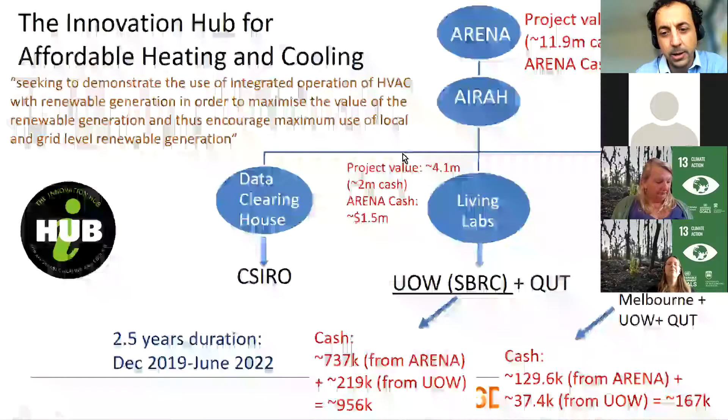But today I'm here to talk about, not about the Sustainable Buildings Research Centre, but a project that we are working on at the Sustainable Buildings Research Centre called the Innovation Hub for Affordable Heating and Cooling. This is a project that is partly funded by ARENA, the Australian Renewable Energy Agency. It's a very large project, total value about $18 million, and ARENA is putting about a third of that. The various partners are CSIRO, our university, Queensland University of Technology and University of Wollongong, and our university is also putting some cash contribution into this project, which helps a lot to be part of this initiative.

And one major partner is the Australian Institute of Refrigeration, Air Conditioning and Heating, or AIRAH as we call it, and they are really the interface between ARENA and the rest of the partners in the project. Now, what I will call this iHub, Innovation Hub for Affordable Heating and Cooling, we call it iHub.

Essentially, the project is a 2.5 years project that looks to demonstrate how we can better manage the heating, ventilation, air conditioning loads in buildings to shift them towards the periods of the day or of the year when we have renewable energy generation, and in this way maximize the value of renewable generation. Because as you probably know, this crowd here knows that some of the disadvantages with renewable energy is that the loads don't necessarily match together with the generation, so that imposes some restrictions in the electricity grid. We are looking into how to better manage those limitations and improve that and maximize the value of renewable energy, so that we can see further deployment of renewable energy systems in the near future.

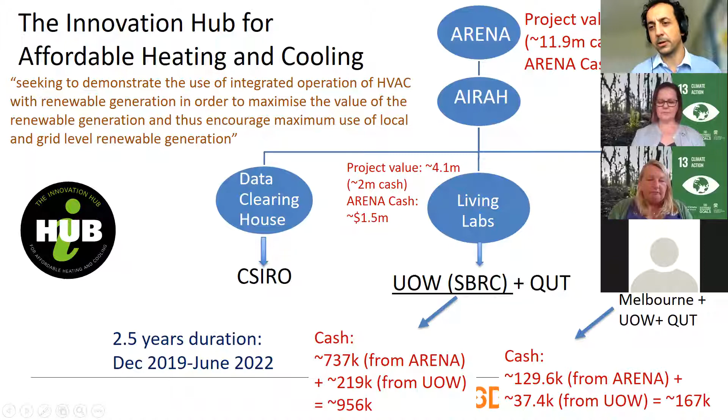As a university, we are involved. I would say there are three really activity streams in this project. There's the Data Clearing House project, which is an initiative that we are not really involved in - CSIRO is really managing that. But as I will explain in the next slide, this is really a kind of data broker that looks to bring together building owners and data providers to be able to connect them so that there is a better management of energy loads in those usually large commercial buildings. I'll talk about Living Labs, which is the main stream that our university is part of - I'll talk about that in length in this presentation - and then I'll also discuss what we call the Integrated Design Studios, which is an initiative managed by the University of Wollongong, but we are also participating to deliver some of the sub-projects in this stream.

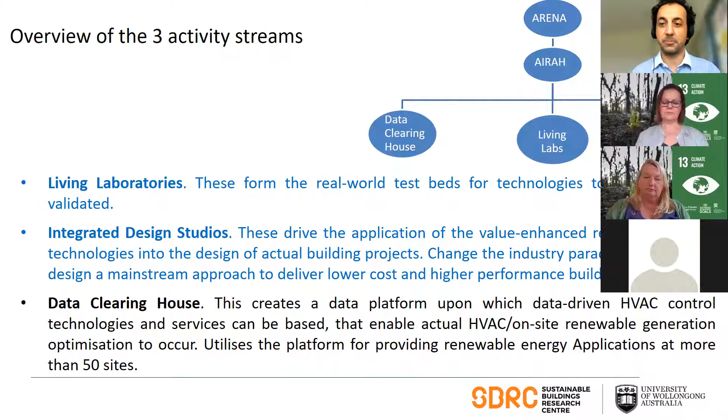The design studios are classroom activities that bring together consultants from different disciplines with students and academics, trying to improve the early design stage of buildings and enable more integrated thinking between disciplines, bringing ideas of making buildings more sustainable and enabling renewable energy integration right at the early design stages, which isn't happening in most situations.

So I'll start with the Living Labs. There are several sites where together with QUT we are deploying our monitoring equipment and doing technology evaluations. We separate those into healthcare sector Living Labs and education Living Labs.

I'll briefly cover those our university is involved with. There are 2 schools in ACT, and an aged care facility near Wollongong. There are also 2 sector-wide projects that ourselves and QUT are managing. We're mostly involved with the education one, and QUT is managing the healthcare one.

In these sector-wide analysis projects, we are looking into establishing baseline energy use, renewable energy generation, and other key performance indicators for the ACT schools across the whole state. We've now received additional funding to expand that and include schools from New South Wales and Victoria, and other schools where data are available.

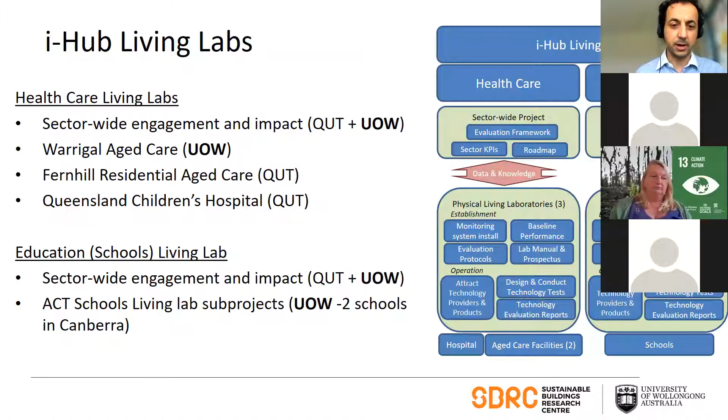Now the Living Labs, okay, there's something in the chat.

The Living Labs, as I mentioned, are real buildings where we use a set of KPIs that we developed to evaluate their performance in terms of enabling better value for renewable energy. They are also the test beds where we get technology providers to bring their technology forward and evaluate it in relation to enabling better utilization of renewable energy.

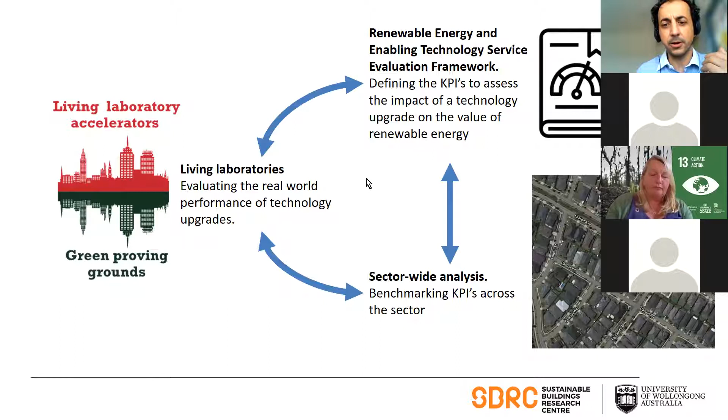We developed what we call REETSEF KPIs, the Renewable Energy and Enabling Technology Service Evaluation Framework, to look into shifting HVAC loads, or energy loads in general, from buildings towards the periods of the day where we have renewable energy generation.

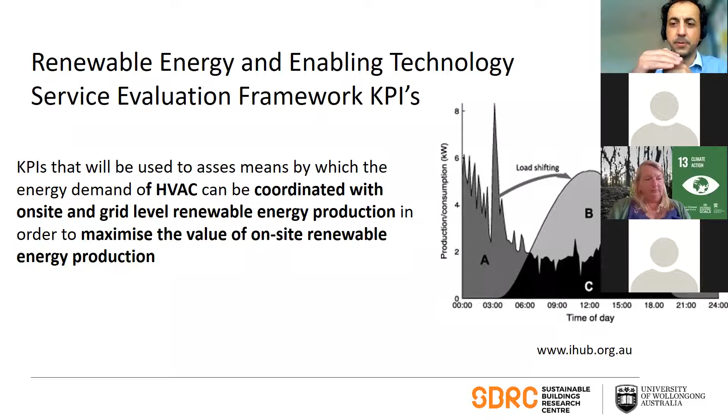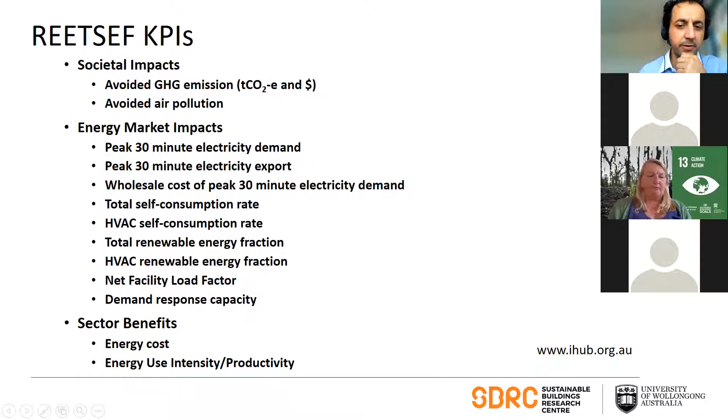A set of KPIs that we developed - I don't have time to go through each one separately, but you can see the relevance to this crowd, as we looked into different types of impacts to society. Arena is interested a lot in the KPIs in the middle, and also sector-wide benefits in general, so I won't go through those.

In ACT, we've got two schools. We've got a very old school from the 1980s, Fadden School, which uses a lot of gas. And we have another school built in 2005, a very large school of about 16,000 square meters, called the Amaroo School. I'll briefly go through those schools in my presentation.

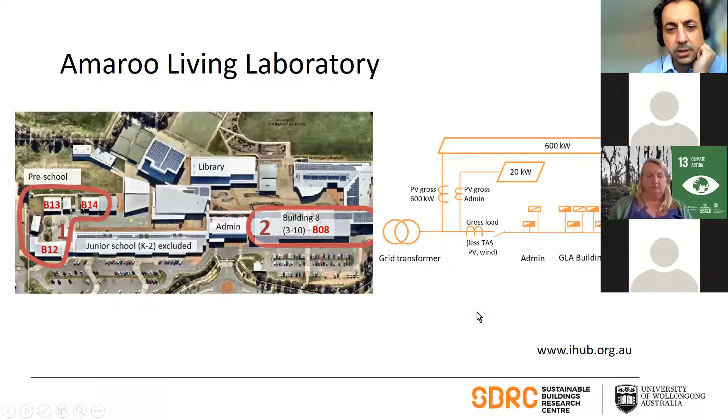For the Amaroo School, we didn't have funding to monitor the whole school, so we monitor sections of it. There is renewable energy generation on site, which we also take into account. We deployed our equipment and a weather station, measuring temperature, relative humidity, and CO2 in classrooms. We use Wattwatchers to measure sub-circuit electricity use, and get the data to our database through a LoRaWAN network. We're also looking into gas.

We quantified our results using our KPIs. The first round of the REETSEF evaluation has finished, but I won't go through all of those details.

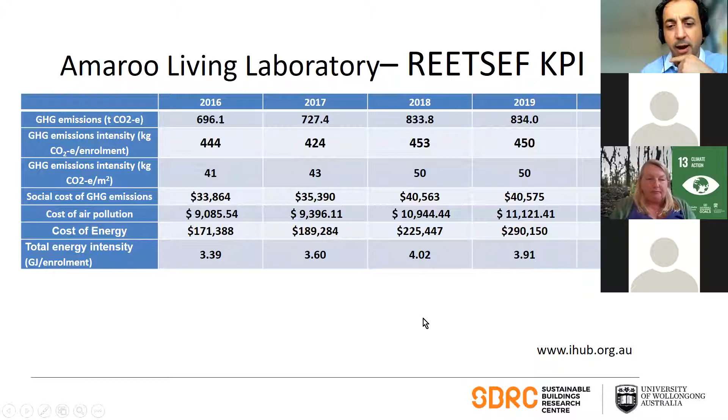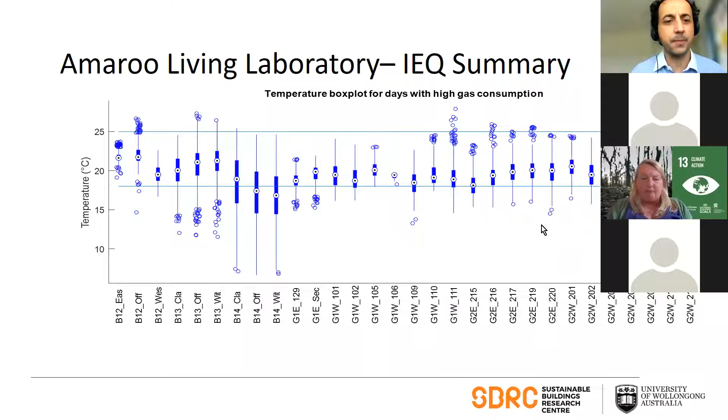In general, this school is relatively poor in terms of temperature. We looked into time series graphs and analyzed our results, putting them in context in terms of comfort ranges and temperature ranges over a period of now more than a year, though this one is I think a 9-month period.

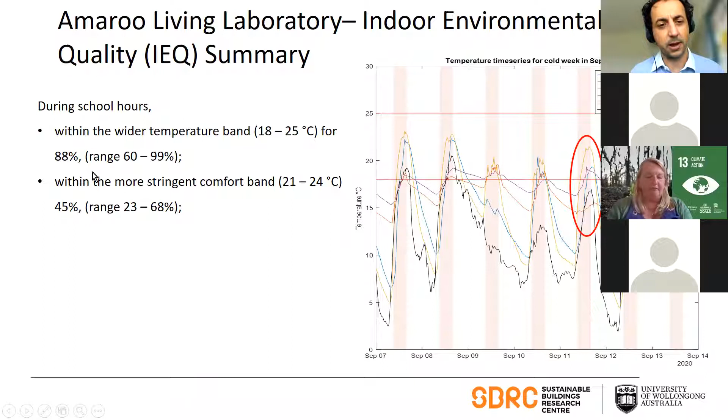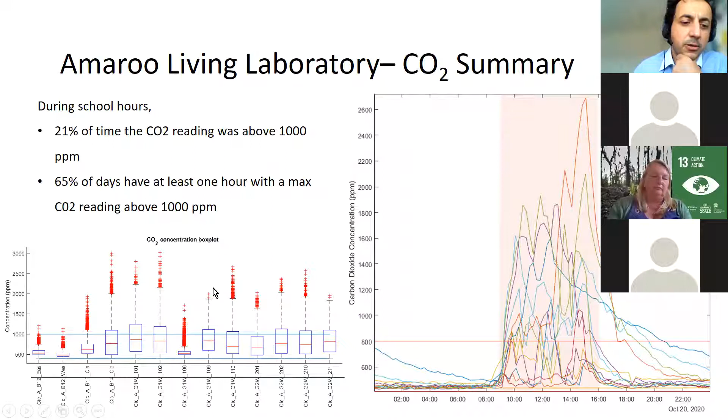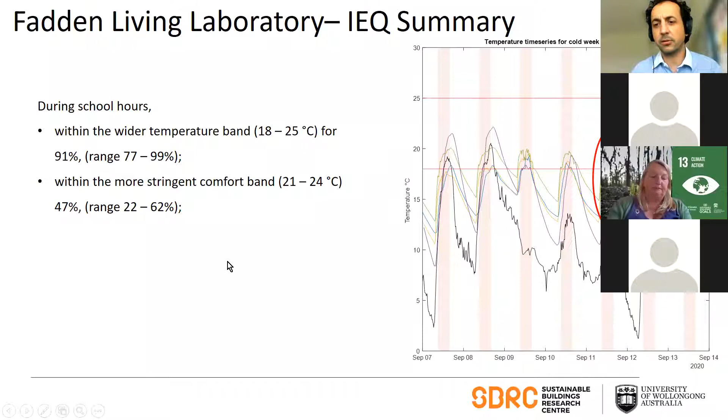So we've got all of this data and we now know how the schools behave. We did the same for the Fadden school—I won't go through the results in detail there, but again we got a few issues with comfort in terms of temperature, though CO2 was much better in that school, with not many instances above 1,000 ppm. Despite this being the older, perhaps leakier school, we're not sure why this was happening.

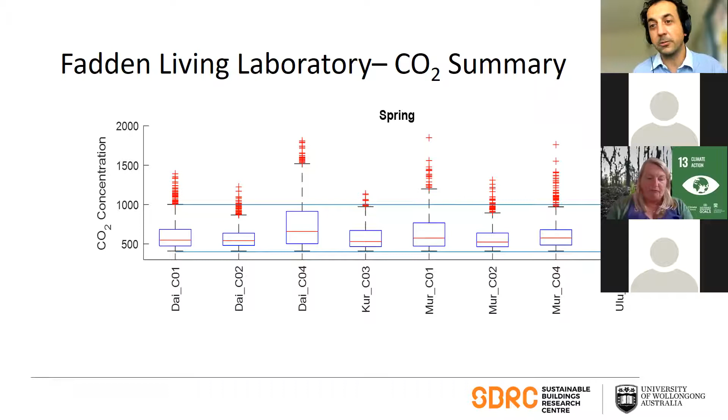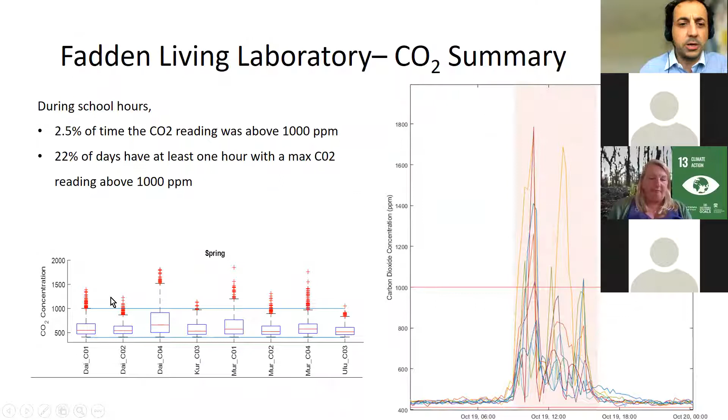This was during spring—in winter and summer you close the windows because the HVAC system is running. So we suspect schools have higher ventilation requirements, and things may become more negative, because in February, for example, when it's very hot outside, the air conditioning system may be working while windows are open. Let's see what happens in winter—something similar will probably happen with a heating system. Again, no significant CO2 issues here, although there are instances of high CO2 levels in classrooms.

We developed a whole-of-life planning framework to enable the ACT school government to make decisions on purchasing air conditioning systems, accounting for energy savings, sustainability, and cost savings in an integrated approach. I thought I had a link in my presentation to download that document, but it looks like my OneDrive didn't update the presentation.

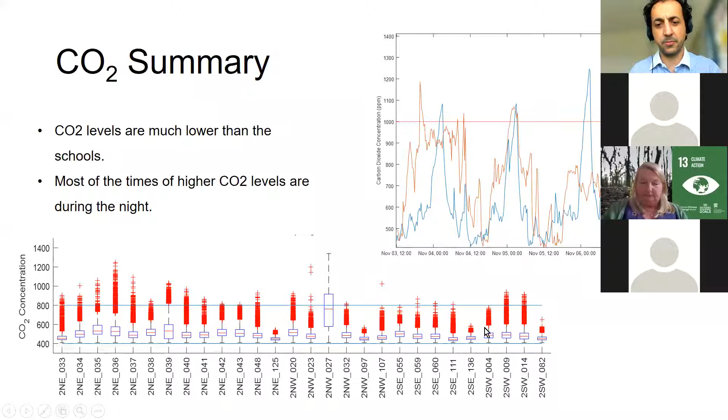For the aged care facility, we did something very similar. I'll skip a few slides as I'll probably run out of time. Again, we have CO2 level graphs there—no significant issues, much better performance than the schools. The same with temperatures: it looks like the air conditioning system in the facility is doing the job it's meant to do. We didn't find significant issues with low or very high temperatures in either summer or winter.

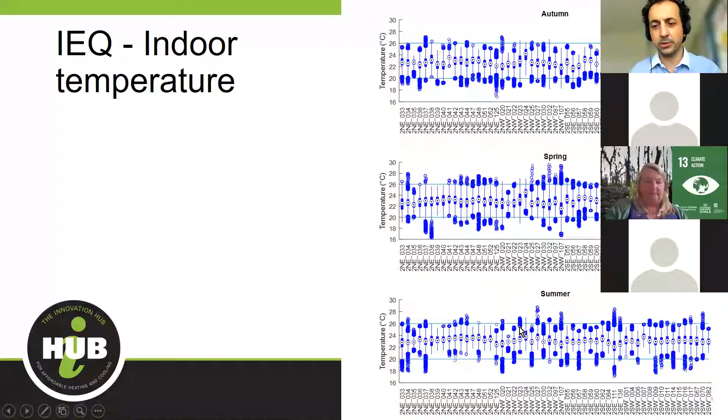That is a very new facility, I forgot to mention. And the system is doing what is meant to be doing.

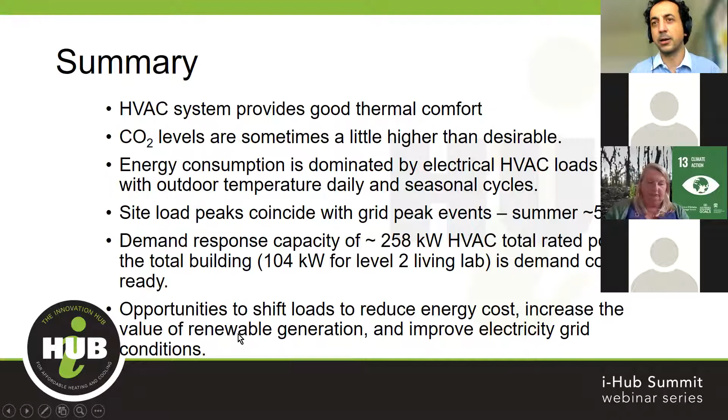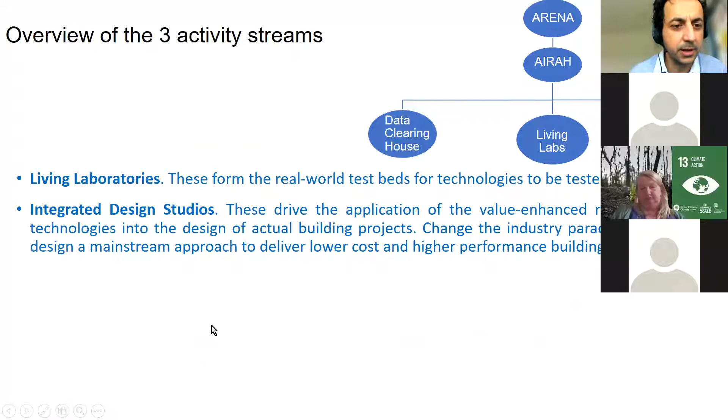I'm suspecting I'll probably have another 5 minutes or so. So this is more or less what we are doing for the living labs. And I cut down a lot of slides from my presentation before this meeting here. With integrated design studios, we're working with University of Wollongong.

Perhaps I should mention what is an integrated design studio. These are workshops that take place in classrooms at the start, and consultants are coming together. We engage a client who gives us a real project. So far we've had 4 of those run at Wollongong. We have 4 consultants coming in every classroom, every week, working together with the students, addressing a project that the client puts forward.

for a design for a building. And I'll go through what we had so far, but the idea here is to get the architects working together with engineers to enable a collective thinking of how we can improve designs during the early design stage. And in this way, we can enable more integration of renewable energy and more passive design solutions in buildings at the same time.

So these studios are win-win project incubators. The clients win by accessing for free early ideas of what the new building could be. The consultants, architects and engineers, they get paid by ARENA, but at the same time, they get to network with both clients, ourselves, and between them.

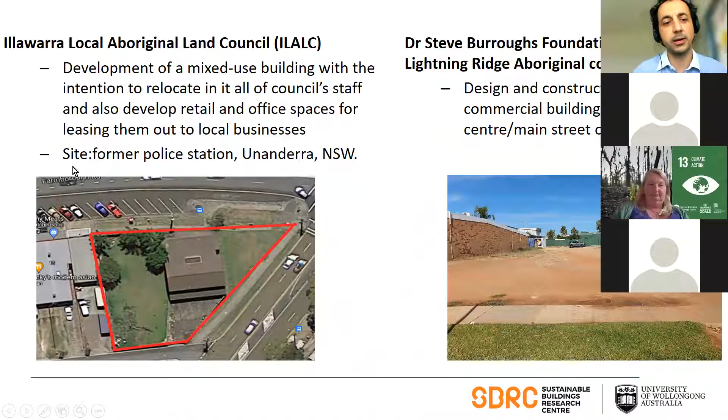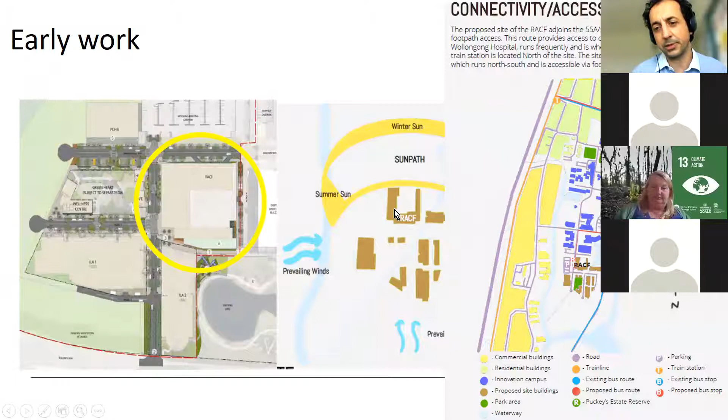And the students started producing great work out of these projects. They've done a site analysis where they looked into things like solar paths, prevailing winds, and so on for the project sites. They developed huge matrices where they put together various design solutions that they came up with, and they started ranking them initially without very detailed calculations, but then later on we moved into detailed analysis, and these design solutions are very relevant to the crowd that we have here today.

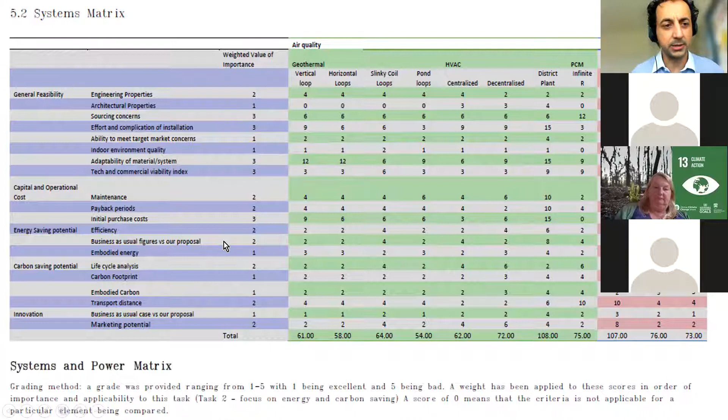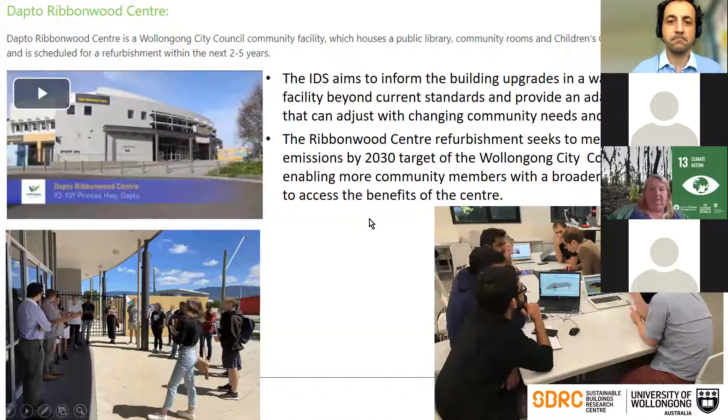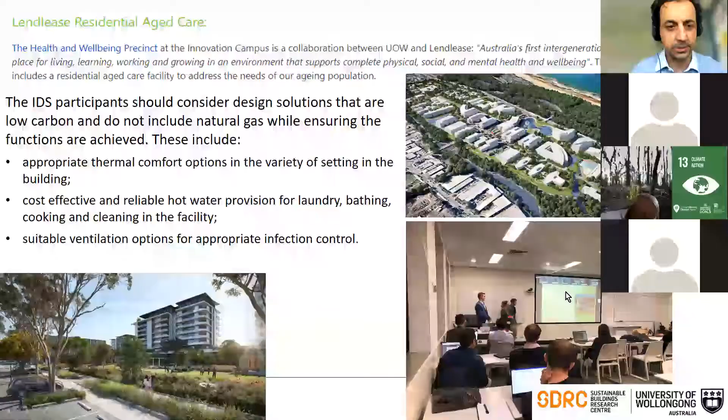The same with the Lendlease project. The students gave presentations to both the clients, the consultants, and ourselves. They brought forward several good ideas that were interrogated by the consultants, and they were forced to think on how to beat the business-as-usual cases. So as part of the project, they had to benchmark their ideas against the business-as-usual cases that we see out there.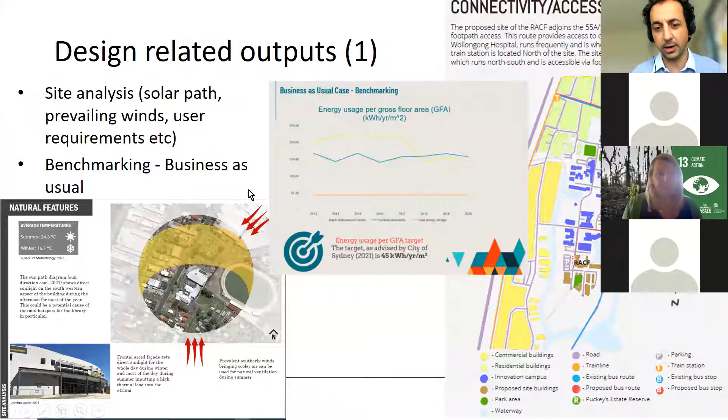And for the other two, the Aboriginal projects, the students, we're running them this semester, and the students started developing visualizations that later on they will be installing PV systems and so on to quantify those relationships between energy demand and supply.

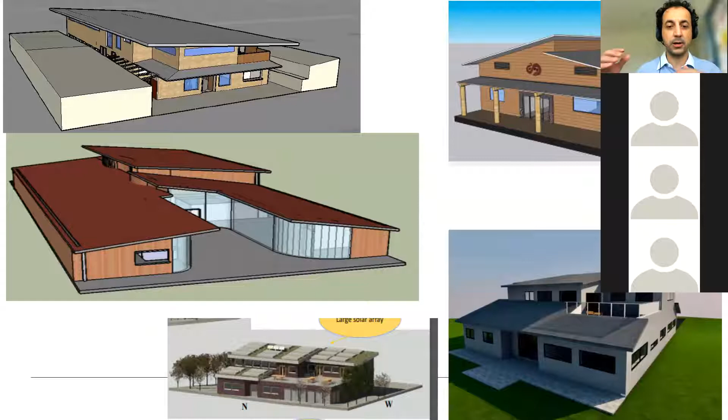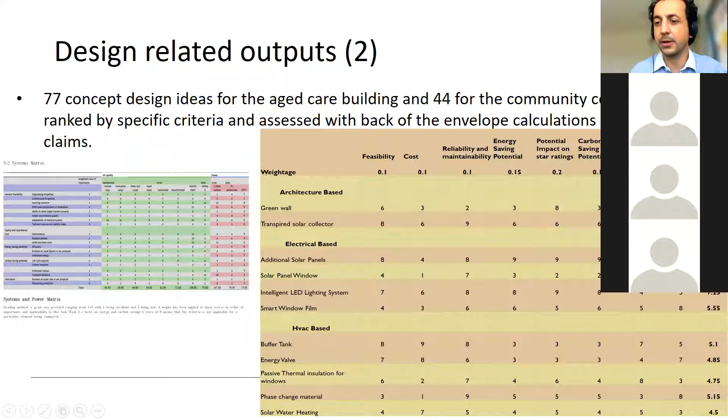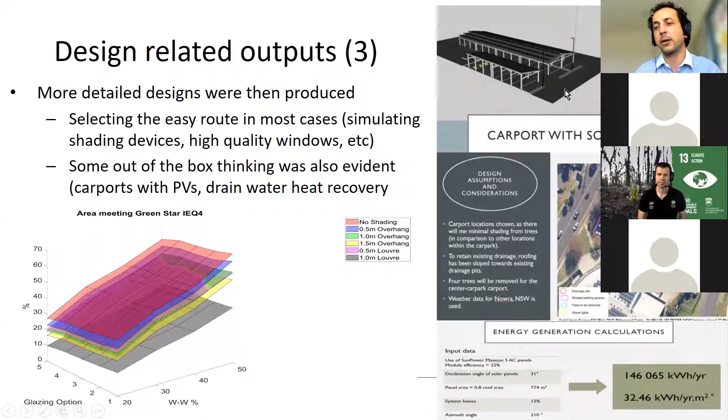Again, a lot of design solutions for all the buildings of the studies in the matrices, and some very great ideas and detailed analysis that the students used computational tools to quantify. As one particular example, this is the Dapto Ribbonwood Library. One of the students looked into detail how to modify the parking and enable carports with PV panels on top for electrical vehicle considerations in the future.

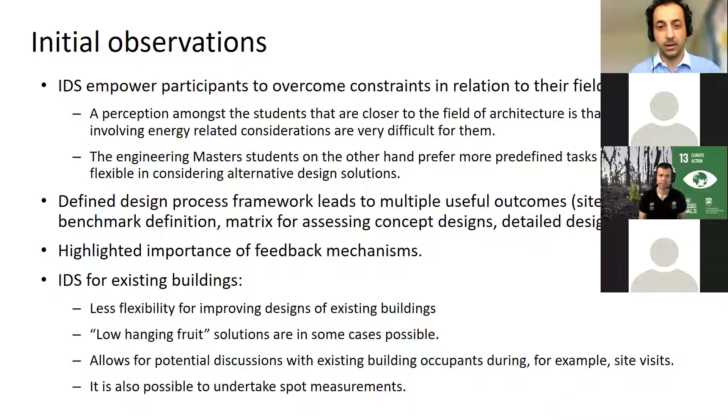I'll skip those observations, but we have seen some differences working with existing buildings versus working with plain sites - it's very different. But in both cases, you need to enable that renewable energy integration thinking in the designs or retrofits.

I'll stop here with this slide, if that's okay. I probably took more time than I should, Clayton.

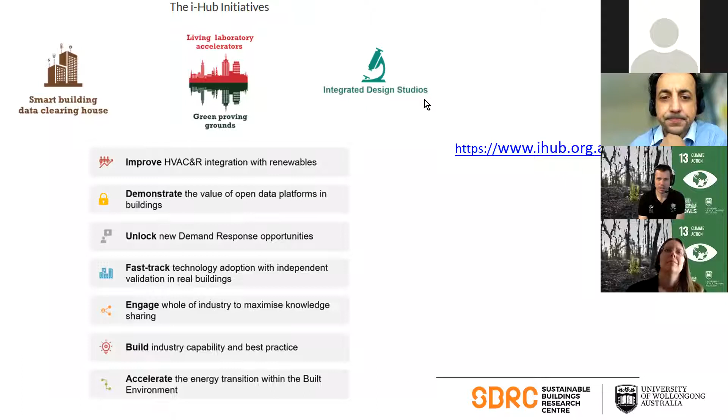Thanks, Clayton, and thanks, Georgios, for taking us through the iHub beforehand. I'm going to talk about another initiative that we are involved in at the Sustainable Buildings Research Centre, and this is called the Sustainable Homes Challenge.

I'm just getting my slides to work. There we go. So the aim of the Sustainable Homes Challenge is to bring together university students this year from around Australia and from a wide range of disciplines to develop innovative solutions to the problem of providing sustainable, healthy and affordable homes. The Sustainable Homes Challenge was dreamt up in around 2018, 2019 by a group of academics within the Sustainable Buildings Research Centre.

And some colleagues as well from other faculties. What they wanted to do was provide an opportunity for students to dream big about some of the big problems facing our world and to think about what they can actually do, and to explore some innovative solutions to some of these challenging problems.

The program is being financially supported by the University of Wollongong's McKinnon Walker Trust. Ken McKinnon was a previous VC of the university, and he and his wife established this trust to support projects that really stretch students' experiences.

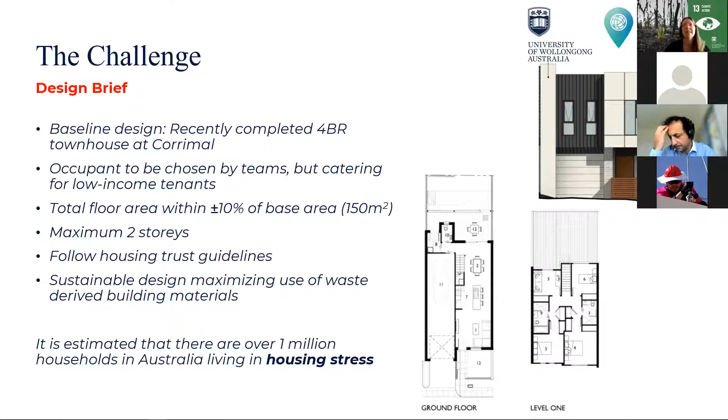So when we've asked the students to design these houses, we've given them quite a broad set of evaluation criteria to hit. They're broadly categorised into 4 different categories.

So the first being sustainable, we want them to look at things like the materials that they use in the life cycle analysis, and what happens to the building at the end of its life. Can you recycle the components of the building? Can you deconstruct it? Can you take it down? Can it adapt if the occupants change? All those sorts of things.

We also want the buildings to be healthy, to ensure that they're meeting the needs of the occupants, so that there's no nasty chemicals being introduced, particularly if using innovative construction products, but also that they're meeting the needs of social and cultural interactions of the occupants with those around them.

And we need the housing to be affordable. So looking at the energy requirements that people can afford to operate and live in these houses in a way that's comfortable. But then other aspects like the value proposition of the house. Is it something that could be marketable? Is it something that could be upscaled and used on a larger scale? And does the supply chain for the innovative materials that they're looking at actually exist, or how can those supply chains develop in order to develop these designs?

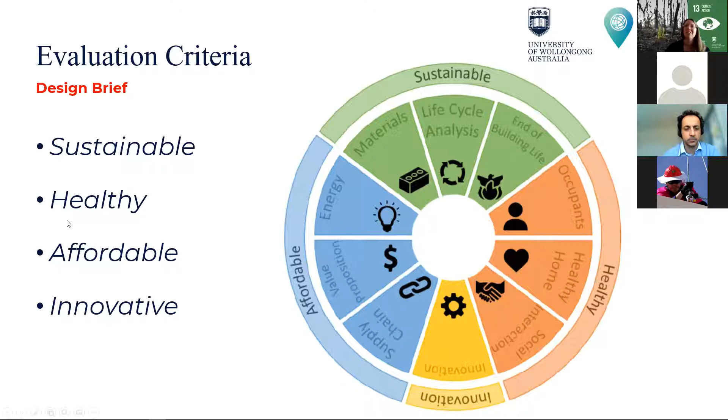And then underpinning all of this, we have innovation, because we really want the houses to be innovative and to get the students to think outside the box and come up with some amazing designs, because that's honestly one thing that students are great at, is thinking beyond the standard things.

So why homes from waste? It may sound a bit strange trying to design a home from garbage, but when you think about waste that is generated in Australia, the circular economy and the need to design circularly is starting to gain a lot more traction, especially in the construction industry.

Part of that is because the construction industry generates about 44% of all the waste in Australia. It makes an enormous amount of waste. In 2019, that was about 27 million tonnes of waste. And overall, the waste generation in Australia is actually starting to decrease per capita. The changes people are making and the way we are living is starting to have an impact, and that waste is starting to go down.

But we keep building more houses, and we're not doing enough in construction to change. Construction waste has actually bucked the trend of overall waste generation in Australia, increasing by 32% over the last 13 years. So this is obviously something we need to address and improve on.

Now, a lot of construction waste is recycled. It actually has quite a high recovery rate, around 70 to 80%, but that still means we're sending 20% directly into landfill. Even the stuff that is recycled is mostly concrete and heavy masonry materials, but typically they're just downcycled - made into aggregates, used in roads, used in places where the value of that material isn't really captured. It's a low value product.

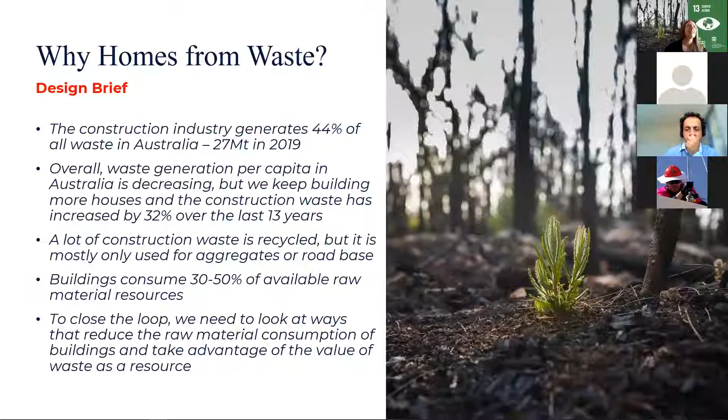So back to the challenge, the scholars that we have. We currently have 27 students involved. We started off with 30 and the numbers have fluctuated a little bit because this has been a fairly challenging semester for a lot of students. So understandably, it's difficult to balance all the needs.

We have 6 universities involved in Western Australia, South Australia, the ACT, Victoria, as well as Wollongong, obviously. There's too many disciplines to specifically list, but we have students from architecture, civil engineering, architectural engineering, environmental engineering, computer science, economics, social geography, social work, and education was another one I didn't list.

So we have a really broad spread of students, and we had almost about a third split between architecturally orientated students, engineering orientated students, and then a third of our students are from other disciplines, to really bring in that people element and that other worldview. One of the biggest feedback we've got so far from the students is that they're loving working in these interdisciplinary groups, that they're really gaining a lot from being around other perspectives and just people who think differently. And that's really challenging their worldview and how they approach the problem.

So the timeline: we started in July this year, and we've been running alongside the standard university session with our groundwork phase, which has been purely online, not even withstanding the fact that we would have needed to anyway. It's composed of some online workshops and challenges, some online courses we've provided for the students to take them through different concepts they need to consider. Outside of that, they've been working in their teams to develop their design and their ideas. They've just finished their concept development last week, and from now until finale week, they'll be working to develop that design a lot further.

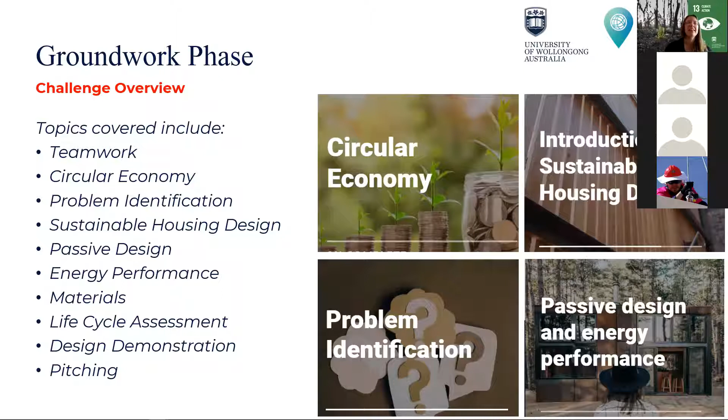So some of the groundwork phase topics that we've covered, I mentioned we've run a bunch of online modules, and we've covered a whole heap of topics from things like teamwork, circular economy principles, problem identification, sustainable housing design, passive design, energy performance, materials, life cycle assessment, design demonstration, and even pitching. So kind of how do you take these design ideas and how do you communicate them effectively?

And then finale week, I already kind of talked through most of the things that are involved in that. It's just the main thing to note that the designs that the students develop will all be available online at the end of the challenge. We'll actually host them through our website, including their video pitch and some form of display of the designs they come up with, so that there'll be a really interactive format that the community can engage with, that everyone can engage with, to see what the students have come up with and the ideas that they have.

So if you'd like some more information, we do have a website. The website is just there, but it's also hosted on the EIS, the Engineering Information Science webpage. And if you go to our website and have a look, you can also see we've got a few blogs from the students coming out. I think there's about 5 up there at the moment and more to come. These are just opportunities to meet some of the students who are involved and what they're getting out of the challenge. And there'll also be some links to our Homes from Waste Symposium and finale event, which is on the next slide.

So the final showcase that we have will be on the 3rd of December. And this will be completely free and open to anyone who's interested in coming along. We're going to kick off the morning with a symposium where we invited a bunch of industry and academic speakers to take us through some of the key challenges and the key opportunities that exist in this space when we think about homes from waste.

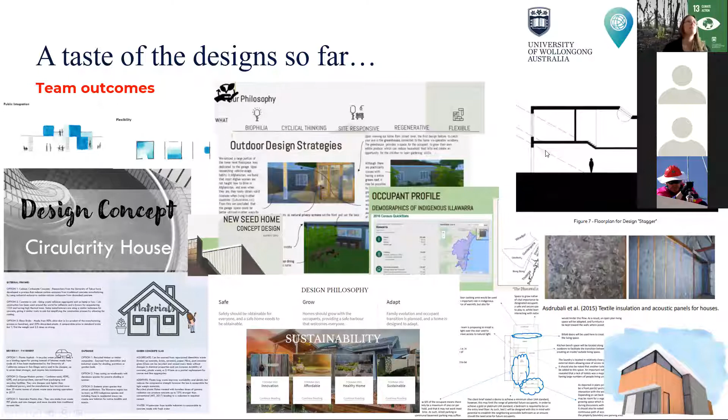All right, and I'll just finish there. I finished with our website, so if you want to go along and check out what some of the students are doing, or at least hear their blogs. But otherwise, we look forward to being able to share with you more in December when we see some of their outcomes.

Fantastic. Thank you very much, Leela. That was a very inspiring presentation on some of the work that's happening. And the same from Georges, some of the work that is happening amongst the Sustainable Buildings Research Centre.